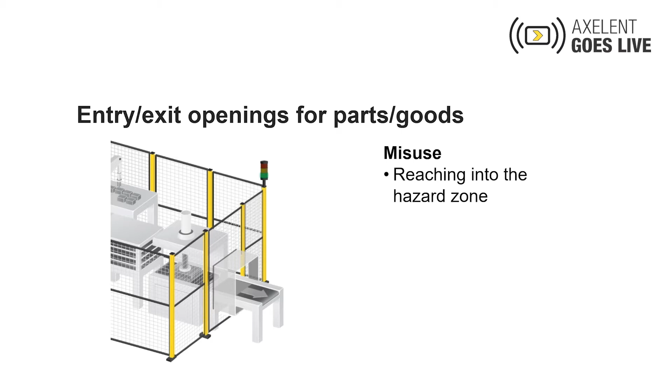But you may wonder, what reasonable person would crawl into a dangerous machine while it is operating? Well, the simple reason might be that it saves him a lot of time and trouble. He wants to fix a little problem, and it would take a long detour to go and open some door, walk up to that space, then fix the problem, return, close the door, reset and start the system.

Also, stopping some systems might cause faulty parts and a lot of waste thereby. It might need a lot of time to properly reset and restart the system, so people take a shortcut. But of course, such misuse of openings is very dangerous and must be prevented. How can we do that?

The most important measure is to keep entry and exit openings as small as possible. It should not be possible for operators to reach into the opening with a body part larger than a hand or arm. Additionally, ensure that no hazard is within arm's reach. This extract from ISO 13857 shows that 120 mm is a limit you want to keep in mind.

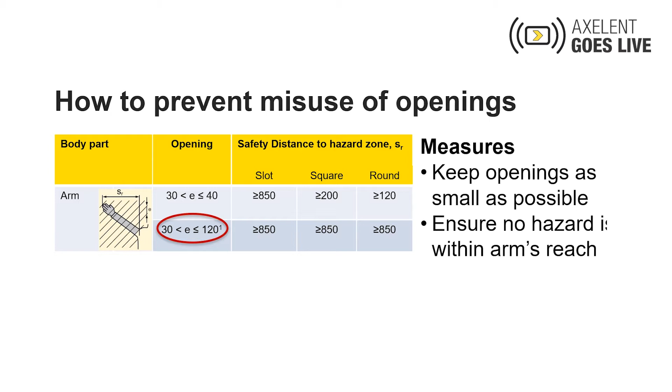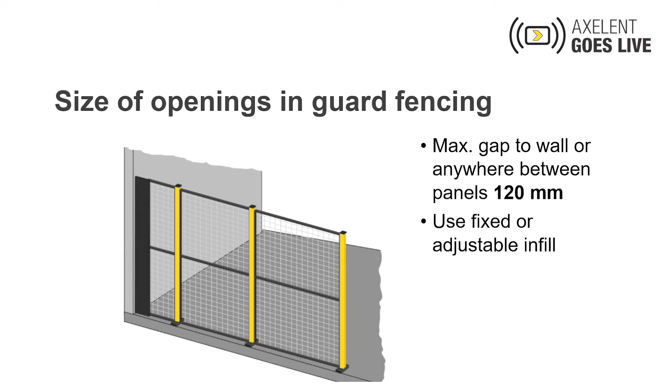Ensure there is no larger gap than 120 mm between a wall and a guard fence or between fence sections. If there is a larger gap, close it with a fixed or adjustable infill. The maximum size of a slotted or rectangular opening is 120 by 240 mm.

Since an opening that is larger than 40 by 65 mm allows a hand and thus an arm to pass, any hazard must be a minimum of 850 mm away from the opening. That is the arm reach. ISO 13857 adds two important notes.

Slotted openings larger than 120 mm may need an even larger safety distance, and rectangular openings larger than 180 mm or square openings exceeding 240 by 240 mm allow the entire body to pass. That applies not just to contortionists. Some people are quite small and skinny and might be able to crawl through such an opening.

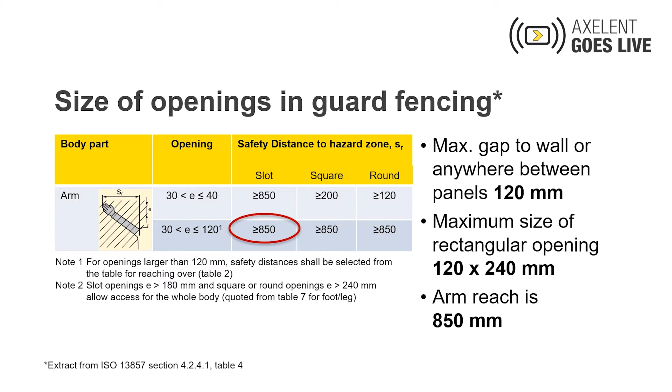At this point, I can almost hear some of you say, "Isn't this taking the thing a bit too far?" I mean, after all, somebody who crawls into a dangerous machine does so deliberately, knowing that there is a hazard. Shouldn't it be enough to fix a warning sign there to keep him from doing that? Well, that's a half-truth at best, because machinery safety standards require that we take two other steps before we decide for a warning.

First, we should try to remove the hazard altogether. We call that inherently safe design. If that is not possible, then we need to add safeguards. That could be a fixed or movable guard, a monitoring function, or some kind of manual control function.

And also please remember that sometimes people do not deliberately enter a hazard zone through an opening. They might slip, stumble, and fall, and then reach with body parts into the opening.

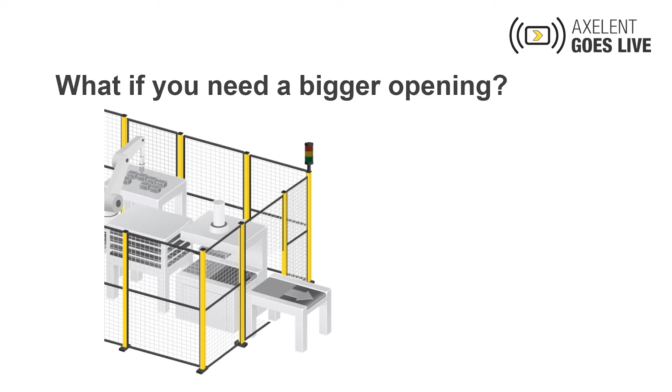But what if you need a bigger opening? What can we do? There are different options. For one, you can add an entry or exit tunnel. It must be at least 850 mm long, the arm reach length. You may also add a light barrier in a tunnel to monitor access. Of course, it needs to be muted when parts enter or products exit. Or you may install an automatic door with contact bar and safety switch.

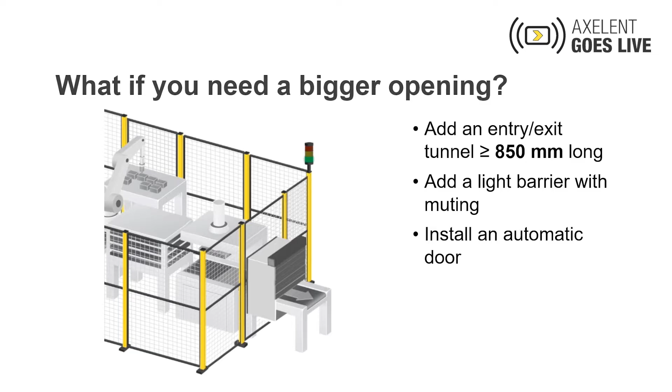Whatever measure you choose, be sure to add a warning sign also. Openings that are not permanently needed during operation for entry and exit of goods should be covered. Normally what we use is a removable sort of cover called a fixed guard that can be removed for maintenance but normally stays in place.

If access is needed more frequently, then a lid, a shiftable cover, or a door with hinges is the better solution. These are called movable guards in standards. But when to use which? When do you opt for a fixed guard, and when do you use a movable guard? Let's look at this topic next.

When deciding for a fixed or movable guard, consider 3 factors: the need for access, the type of work to be done during access, and the frequency of access. To make the decision, ask 3 questions. 1. Will access to the hazard zone be needed at all? If the answer is no, a fixed guard without any interlocking is sufficient. The machine will have to be shut down before such a guard is removed.

If the answer is yes, a second question must be asked. Will access be needed during operation, for instance to insert parts, check things, or resolve frequent faults? If the answer is yes, a movable guard with interlocking must be used. Interlocking means that the machine stops when the guard is opened and cannot be started as long as the guard is open. Why is that necessary?

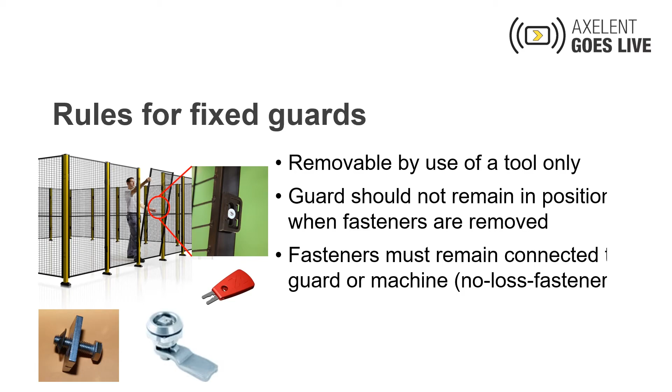The third rule is somewhat strange. The fasteners of the guard must remain connected to the guard or the machine when the guard is removed. That is, you need to use so-called no-loss fasteners. 3 possible solutions are shown here. A clamping element, as on X-Guard posts, a circlip securing the bolt, a quarter-turn sash fastener. But you may wonder, what is the reason for this strange rule?

Well, when fixed guards are removed and the bolts are taken out, then these might disappear. One might be put in the pocket of the technician. One might be put in his toolbox. Another might drop to the floor and roll underneath the machine. When he tries to refix, he will use just those bolts that he still finds. After removing and reinstalling a guard several times, there may be few or no fasteners left.

Then, other things are used to fasten it. Many, for instance, use tie wraps or twisted wire or some kind of bolt or screw that they just find, that they have on hand. Then the guard is not properly fixed. And finally, after some time of this practice, the guard may not be reinstalled at all and the danger spot open during operation. That's not what we want. So we want and need to ensure that the fasteners remain either on the guard or on the machinery.

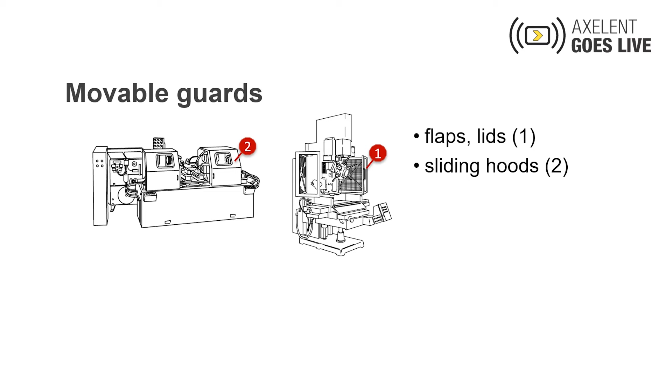Let's now look at some rules for movable guards. Movable guards take the shape of flaps and lids, sliding hoods, or doors, hinged or sliding. There are 3 basic rules for movable guards.

It must be possible to open them without using a tool, for instance by pressing down a door handle. They shall remain fixed to the machine when open, which is achieved by hinges or a sliding rail. And most importantly, they must be interlocked with the machine's function. What does that mean?

Interlocking guards have 2 main functions. They prevent start when open, and they cause stop upon opening. To achieve that, one needs a door safety switch that monitors the open and closed position, telling the machine what the state of the door is.

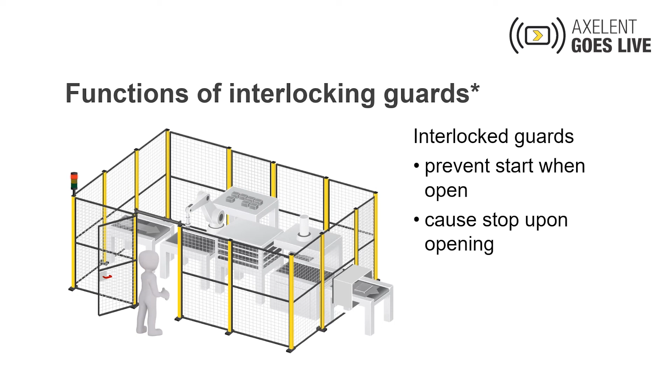And there is an important additional requirement. Closing of the guard must not directly start the machinery. After closing the guard, the operator must take action to start the machine willfully. In most cases, he will press a start button. In large integrated manufacturing systems, 2 willful actions must be taken before restart. A reset button must be pressed, and then the start button.

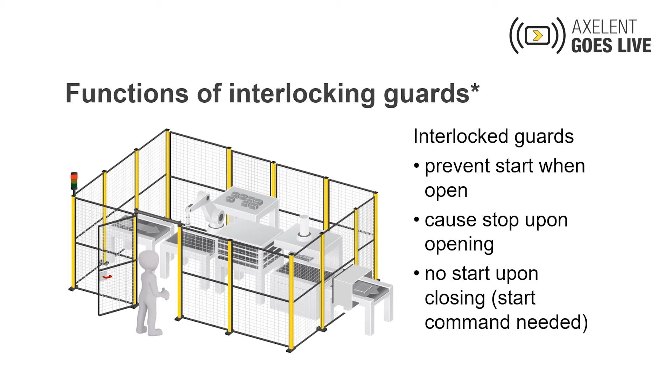As you will have noticed in our little animation, there is a downside to interlock guards. They can be opened while the machine is running. That can cause considerable trouble inside the machine, with parts just stopping anywhere. Even worse, the operator might still be able to reach moving parts and get hurt. How can we prevent that? We can use something called guard locking.

What is that? A guard locking device is a special door switch that prevents opening of the guard while the machine runs. If the operator wants to enter the machine, he must first request unlocking by pressing a button. Then the machine stops and after that unlocks the guard.

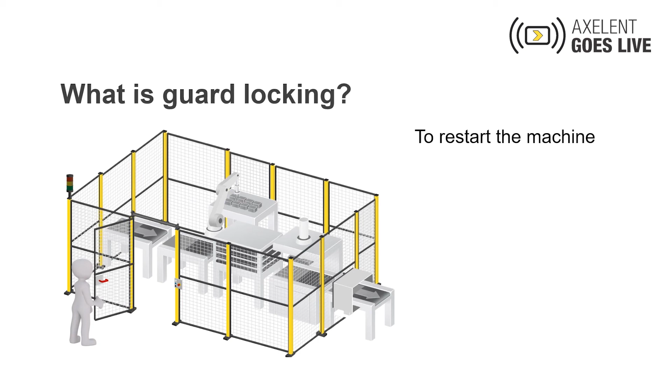To restart the machine, the operator reverses the procedure. He first closes the door. Then he presses the reset button to lock the guard. When the guard is locked, he can press the start button. Only then will the machine start running.

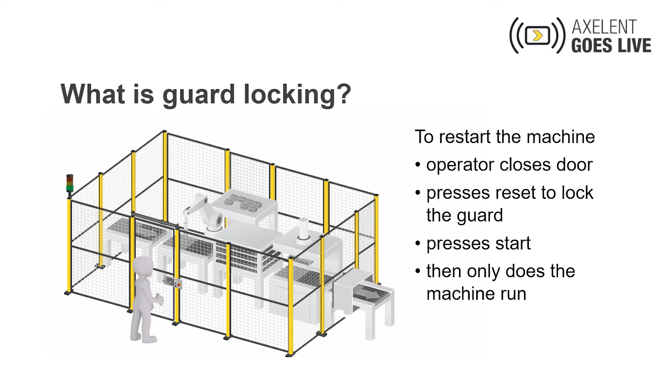When deciding for an interlocking guard that allows opening the door during operation or guard locking, 3 questions should be asked. The first question is, will the machine continue to run for some time after a stop command has been given? If the answer is no, an interlocking guard is sufficient because no moving or hazardous parts will still be accessible when the door is opened.

If the answer is yes, ask a second question. Will opening during operation cause trouble? If the answer is no, an interlocking guard is sufficient. But if the answer is yes, you should ask a final question. Will a hazard continue for a time that is longer or equal to the time required to access the hazard zone? If the answer is no, process-related guard locking is sufficient because safety is not a concern. However, if the answer is yes, a safety-related guard locking switch must be installed.

Fixed, hinged, monitored or locked? What is your guard to be? Let me repeat some of the main points to take away from this webinar. Permanent openings in guards should be as small as possible. Remember 2 limit values. 120 mm is the maximum for slotted openings, and 850 mm is the arm reach distance.